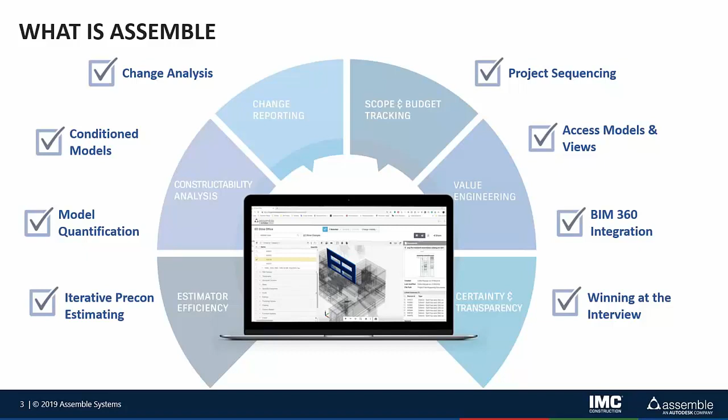And then from there, we have the ability to condition that content and add other classification, organization structure, and then query upon that. So Dave's going to dive into a lot of analytics today and how they use the system to set up the data the right way to provide new lenses, different ways to look at the project. And so that's a really quick, brief introduction of Assemble. We're going to go ahead and dive into IMC's use case and how they're leveraging Assemble to drive a lot of dashboards. So Dave, why don't you give everyone an intro of IMC?

Thanks, Tim. So IMC Construction is a full-service, best value construction firm in the Mid-Atlantic area, located just outside of Philadelphia. We are the second largest contractor in Philadelphia, and we work on projects that range from retail and multifamily all the way to a $210 million lab project and a $180 million medical office building. So we really have quite the diverse range of projects. We really pride ourselves in innovative project delivery, collaborative project delivery, and really making sure we're providing that best value approach to our owners.

The second part of IMC is IMC Construction is part of the Citadel National Construction Group. It's basically a group of regional contractors that get together and work together to serve clients in their regional locations that have national needs. So oftentimes we will partner together to deliver projects for our clients. We get together, we share best practices, we talk about lessons learned, we talk about things that we can improve company to company, and share different resources as well. So it really gives us that national contractor capability as well.

So now we're gonna start diving into some of the things that hopefully people are excited about, and really start to look at some of our use of Assemble and Power BI specifically in pre-construction to begin with. So to start, it's important to understand IMC's approach to pre-construction. We really rely heavily on VDC.

We have 6 full-time VDC estimators that are in-house creating models, and it's very often that we get scenarios like this. This is a project where we received 4 or 5 different facade sketches just like this of a typical bay. We received some sketches of a typical bay of structure, and we needed to establish different budgets for the core and shell of that project.

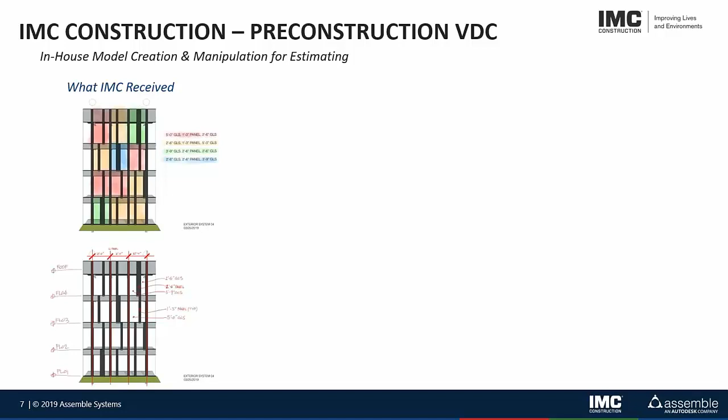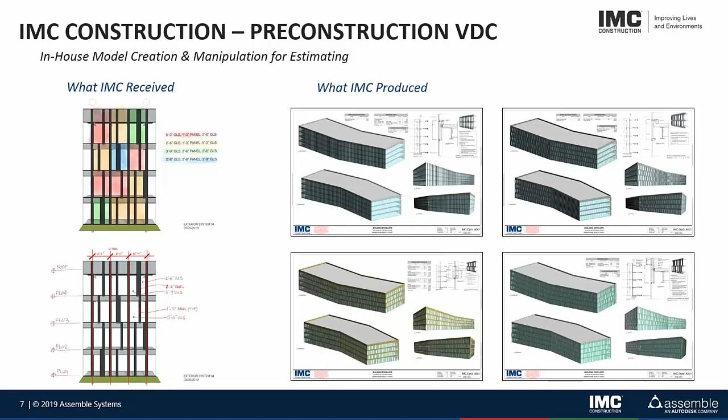What we did from that is we produced our own in-house models of those different facade and structural conditions, and used those drawings to go out to the trade contractors, to different suppliers and vendors with detailed quantities and really get some early pricing that we could go back to the owners and really have some detail rather than just a typical cost per square foot based on a single bay. But what we really needed to be able to do was take this and expand upon it. So this is one example. The same thing with structure.

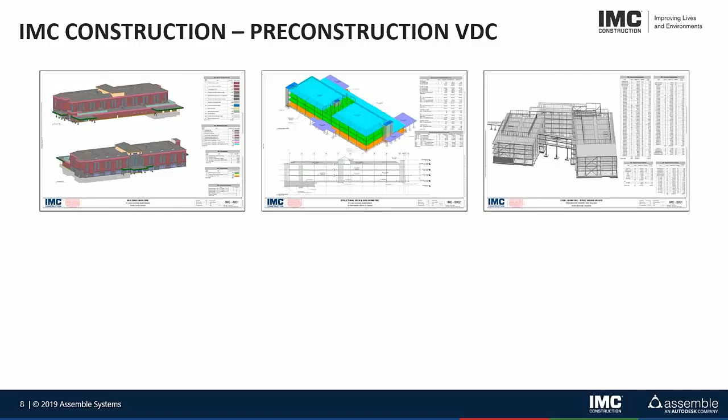We will certainly model the structure, we will certainly model the envelope. There may be different design options that we need to consider. So in here we had a baseline structural option A, structural option B. We'll make a model and a sheet for each one of these versions.

But the other thing we wanted to do is, if you look at the picture at the top right, how could we compare that hospital project to the one on the bottom? We needed to be able to normalize the data sets between these two projects and not just look at overall tonnage. So it really challenged us to think a little bit differently.

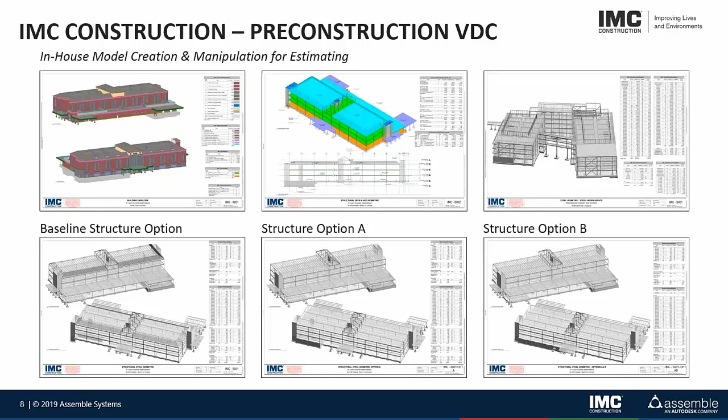On top of that, it's always asking ourselves, how can we do better? What can we do to improve our process? How do we deal with different data sets? What if we had a project like this where we were receiving models weekly for a year? That's 52 different models. If you've got architecture, structure, and MEP, that's 52 different models times 3 models, that's over 150 different models and design iterations to analyze.

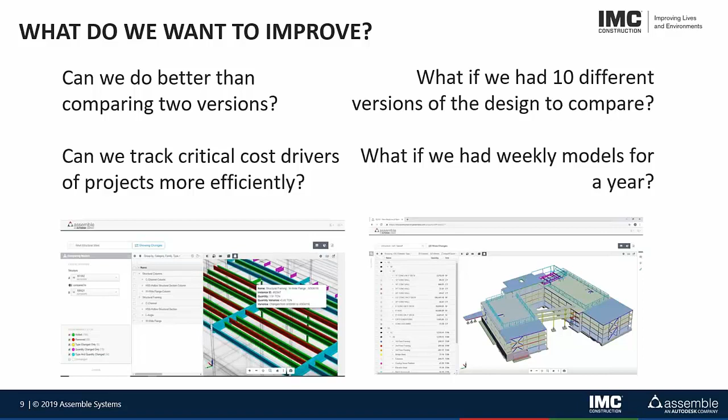That becomes a lot of different sheets and PDFs to compare and analyze, and make sure you're analyzing the data in the same way. So the second challenge we had that we were thinking about was...

We had been using Assemble to compare some different model iterations, some different design models that we were receiving. But one of the challenges was when we're creating models and receiving models, all of the element IDs are changing.

This isn't something that's uncommon for us. We'll always create conceptual and schematic models to communicate our estimates, our budgets, but sometimes we'll get DD and CD models from the design team. If you compare these in Assemble, because it relies on the element IDs, you're going to see that every piece of geometry was added. That's fine for the program, but we needed a way to truly communicate scope change versus development of the drawings versus just grouping things based on element IDs.

So we really needed to think about a different way to group the information, group the quantities, group things in the way that we needed to communicate to the design team and to the owner.

I think that's key, is you have all of this information and there are a lot of different ways you need to look at it depending on the context of the conversation, who you're talking with, what's most relevant, and how you need to visualize and organize that content.

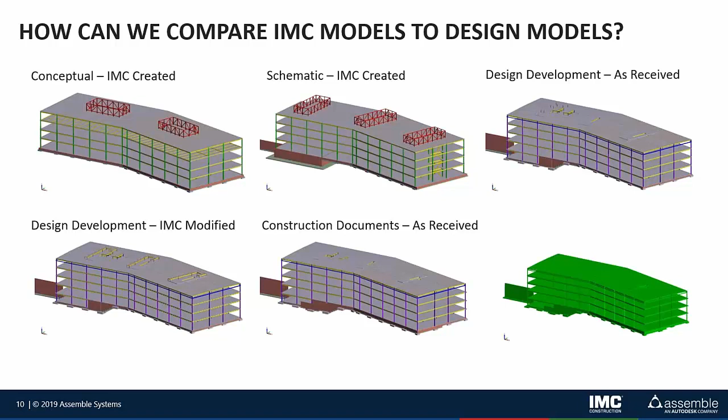So I think that's absolutely valuable, to have that mentality around: okay, this model isn't entirely the right context for this conversation, let me group and organize just this subset of data and apply that to the conversation. I think that's absolutely key to what you have here and what you're going to be building upon to get to these dashboards that you've created.

So one of the first things we did as a group and as a team was really sit down and look at what do we model for most of our projects, and then what do we also see in design models. Those are things we can compare from the beginning to the end if they're in both models throughout the life cycle of the project.

And then it was really asking ourselves, what else do we want? How can we do better? Certainly we'd like to get more into tracking MEP, especially equipment, ductwork, major piping systems. MEP is a big component of the project budget, and the more we can track and control it, certainly the better.

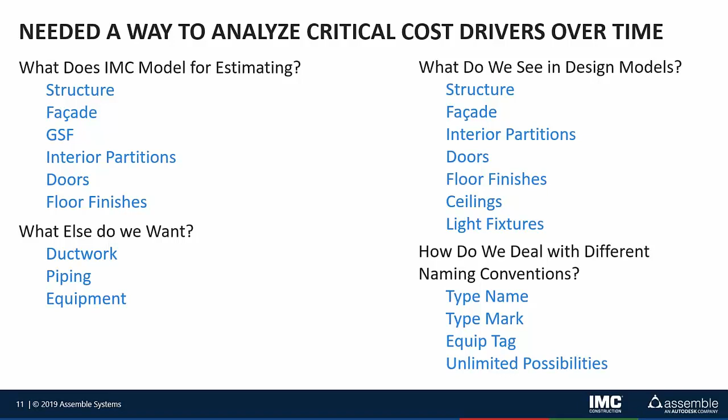The last part is we needed standards and data where we weren't relying on architects and engineers to do things the same way and name things the same way. Everybody does things a little bit differently. We needed our own way to normalize the data set and make sure our templates and standards could apply to any project that came into IMC.

So the next thing, I really highly recommend this if you're just getting into Power BI: we took time and stepped back and went back to pen and paper, pencil, trace paper oftentimes, and we wanted to understand what data we wanted to see and how we wanted it to be shown. We penciled out and sketched dashboards for facade, for concrete, for steel. We started down the MEP route, but we wanted to start simple with the things we know we're going to get on every single job.

It's a quick collaborative process before you really get into the complexities of Power BI, which if you haven't worked with a database program can be overwhelming the first time. I love this, and I love the interaction you talk about with your team.

To me, it's so cheap to work through this on paper with colored pencils or markers like you have here. You can iterate on it, then share out and actually show others the sense of what kind of information you can drill into and why.

I think that conversation, the visual here, leads to why are we doing this, why are we setting this up, and what information can I get out of it and drill into. It's so valuable to have this kind of session and brainstorming with the visual there to lay things out and understand what kind of input you can get from the team, your project managers, superintendent, or executive group, and what information you can provide to them.

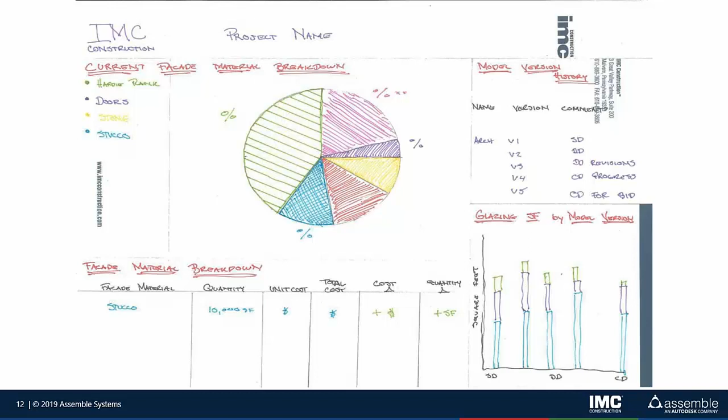It's so valuable. So the last step before we really dove into Power BI and creating some standards was mapping out a workflow and picking the data pieces we needed to have in order to normalize every model into a way that we wanted to look at it and track it.

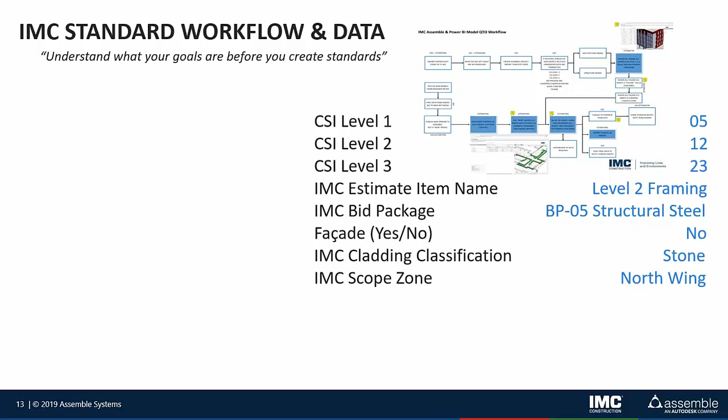For now, we started simple. We basically created 8 different parameters inside our Revit shared parameters file that get applied to every single model we have. Then from there, it was how are we going to leverage them?

What is used in Assemble? What is used in Power BI? What are we sharing with our project managers in the field on their iPads or in different systems? How are we breaking things down by bid package?

The façade one is one you'll see a lot throughout the presentation. We like to track façade—it's a big critical cost component, a big schedule driver, and it's important to get the building enclosed. There's a couple different things you'll see with that, but this really allowed us to leverage our data in Assemble and Power BI the way our company needed to see it, rather than just relying on Revit category, family, type, which has opened our eyes and our possibilities in terms of standards and different deliverables to our clients.

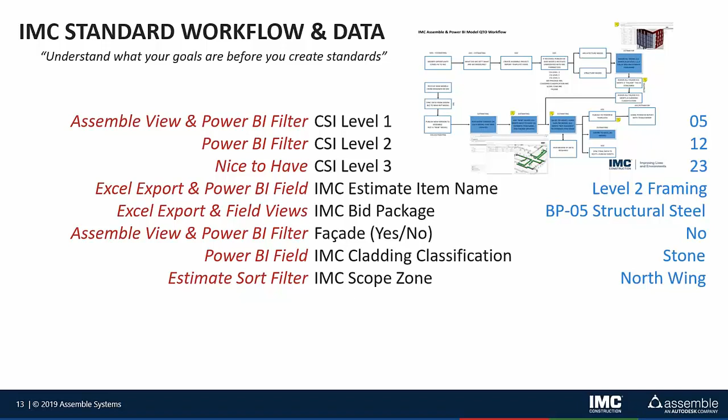So the next thing—our workflow is structured to allow people that are not Revit specialists to use the data. That's one of our key things: we want people to leverage the data and the models, but they don't all have to be Revit specialists. They don't have to understand what a shared parameter is, a text file, and how different things work inside Revit. But Assemble is fairly easy for them to grasp.

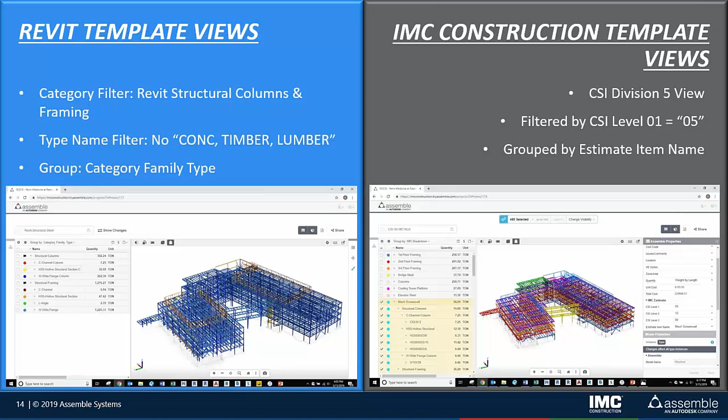You don't have to install software on people's computer. The biggest thing we want them to do is take template views that we've set up and then move the data from Revit into IMC Construction standards. So this next slide will go through step by step a little bit of how that works.

The key takeaway is we really want people to leverage the groupings we've set up with Revit views to populate the data. On the slide before, you saw the example of the Revit structural steel where we have a view that shows everything except lumber, concrete, timber. This has worked for about 95% of the projects I've experienced, to filter that view to just components that have structural steel.

So in one view, I can assign the CSI level, the CSI codes for structural steel, different estimate item names if I want to change it to grouping by level—so first floor framing, second floor framing, whatever it may be—and then I can lump assign all of that steel to one bid package. So in one view, I've probably assigned all the data I need to in roughly 60% of the structural model elements.

The same type of thing with concrete. There's a couple different views you have to go through, but you open the concrete views, you populate the CSI, and everything funnels up into the IMC views that we have, or the summary takeoff at the bottom right.

This is, I think, a foundational thing with Assemble too, having a good structure to those views so that those who aren't totally familiar with the parameters and what properties get aggregated to create these views can easily set these up as a template and bring them into each project, so you as the facilitator can get your team moving and get the right data sets in front of them.

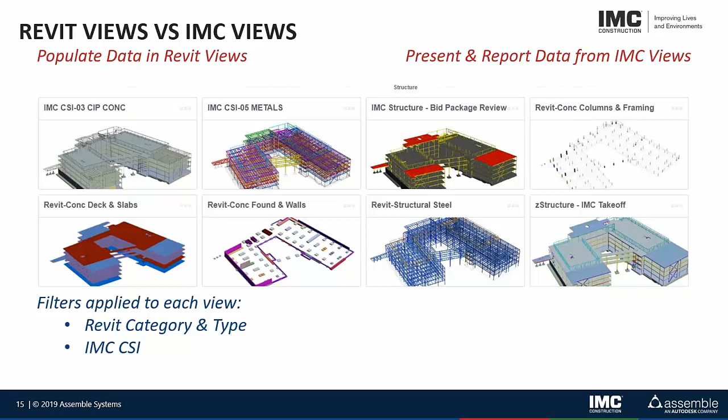So the next thing is, if you look on the left, you'll start to see different namings than Revit category family types. This is reporting the estimate line items based on the structural steel for this project. Our ultimate goal is to align that with monthly billing applications from every contractor. These are views we're setting up for project managers, superintendents, and owners to see the scope being billed and installed every month, rather than just how Revit groups things.

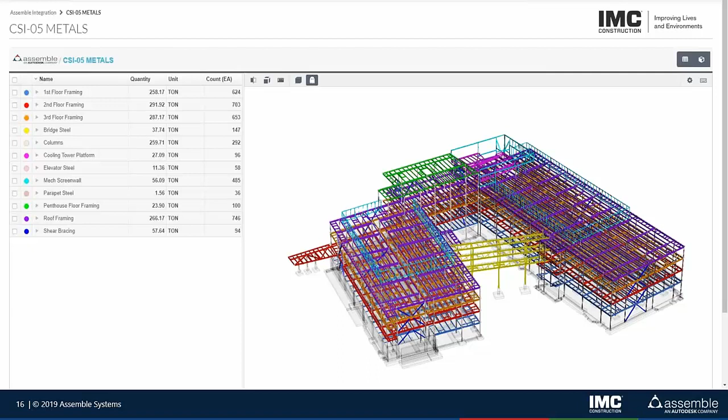Again, it's multiple users collaborating on the same data set, organizing the data how we want to, not how Revit wants to organize it. Finally, we've organized the data, we've gone through standards. This is the first dashboard we're going to talk about.

This is the Power BI version of the pencil copy we looked at earlier for reporting on the facade. I talked about the facade parameters - instead of relying on a wall function being an exterior wall or a type name that's an exterior wall, we literally go into the model assigning windows, doors, curtain wall systems, different walls as part of the facade, and then classify the general cladding type. This allows us to track critical components, percentages of curtain wall, storefront, etc.

What I really think is important is that as you look at this, you understand the data behind it and the science behind it - where some of the data is coming from. So on all of our dashboards, we use the Assemble project name, which we have standards for. We have the model version name, which we have standards for, and then comments that give us an idea internal to IMC about what's in that model, what's not in that model, what we need to know about.

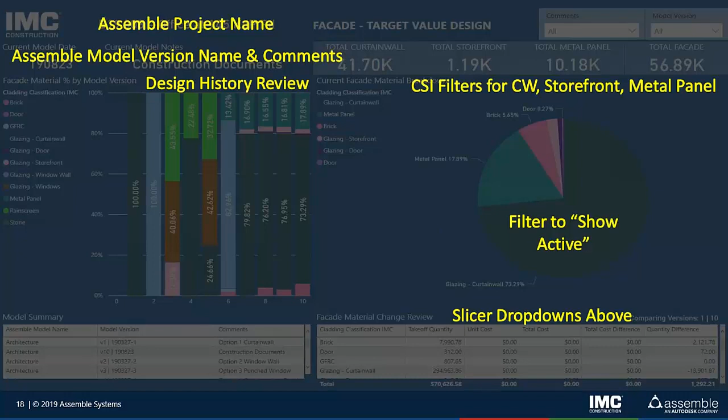And you can quickly see on that dashboard a table that shows architectural models and the individual versions on the lower left there, using comments to organize those, as you mentioned. So you do have the ability to bring in not only multiple models, but multiple versions, and that's what you're going to get into here in just a minute.

Yeah, so the bar chart on the left shows all 10 different versions of the architecture model that we've either created or received, and the different materials that were on that model at any point in time.

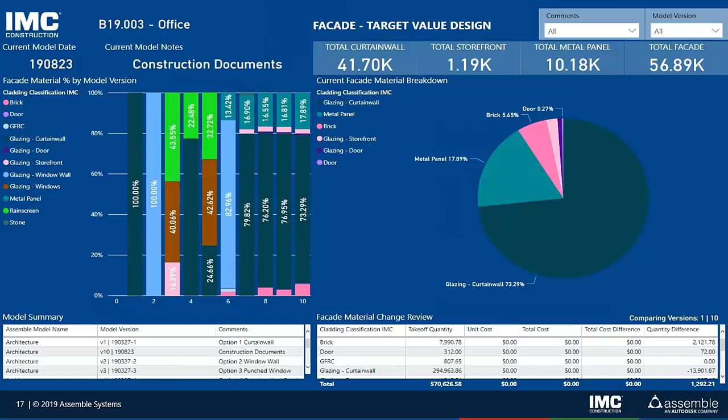So the next part of this is once we have this data for one project, we want to start collecting it for multiple projects and figure out a way to compare cost drivers project to project. Can we compare overall glazing percentage or curtain wall percentage on 5 projects of the same type?

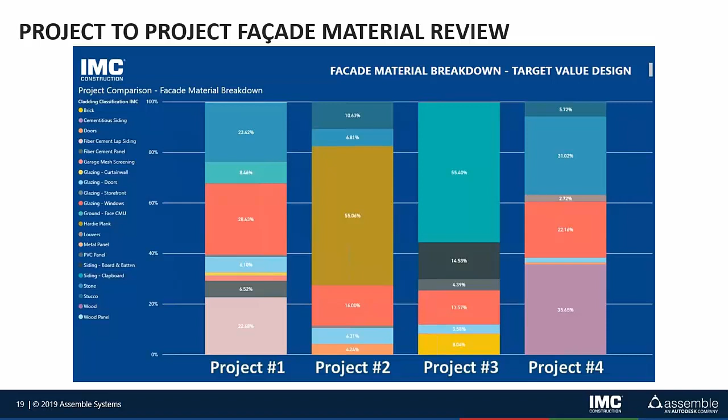That really starts to become something that you can track and analyze and have a discussion on value engineering or why a project might have a higher cost. So really, again, it's kind of data analytics at a big scale across multiple projects. We're intending to do this same type of thing with structural steel, with concrete, with, like I said, the possibilities are endless. So the next one, this is concrete.

So for concrete, everything that we're tracking over time. We're tracking total cubic yardage, so we have KPIs at the top again. What is our total flat work square footage, slab on grade, slab on deck? What is our total vertical wall, retaining wall, foundation wall? And then what is our foundation cubic yards?

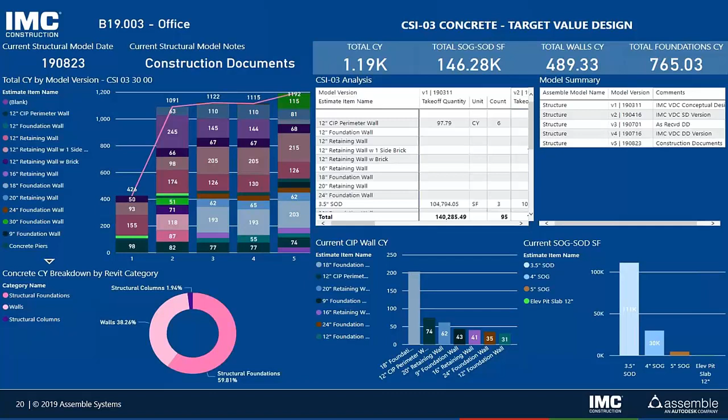Different things that our estimators wanted to have, our project managers wanted to have, our schedulers wanted to have, just to be able to use in scope reviews, in budget reviews with owners, and then schedule updates as well. So there's a lot of data here, and we've got a few more to get to, so we're going to keep moving. For structural steel, same type of thing.

We're tracking total tons, this time back checking against the pounds per square foot that was written into the design narrative from day one. And then we're also tracking what is the total piece count that we have, what is the total linear footage of railing, based again on the CSI 0552 as the filter for that.

The stair count was an interesting one for a little while. We had to figure out how to get the riser count to show up as the quantity in that. But if you are familiar with adding parameters inside of Power BI, it's just adding the parameter and changing it to the right kind of data type.

But hopefully you're starting to see some consistency in the templates that we've set up, just location of different things and how some of the information is tracked and reported and compared, to have our team trained to go to some of the same places to look for the information.

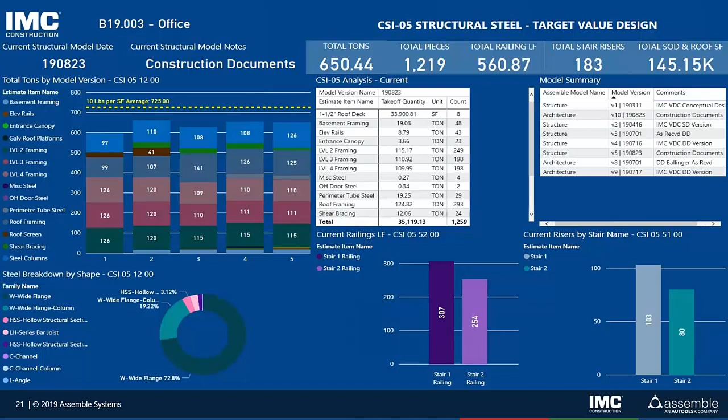So I showed a couple different dashboards there that had a lot of data on it and relied on the data that we're entering. One of the most important things with data analytics is to have a QA/QC process. You have to trust the data that you're looking at. So there's two main ways I review our data in Assemble and Power BI. This is the first one, straight from Assemble's Power BI templates.

The only modification that I did to it was on the left side, instead of grouping things by Revit category family type, this is grouping things based off the estimate item name parameter for IMC standards. So this is the way that we're communicating the scope, the quantity in our estimate line items and in those views that our project managers are using. So this is the same way I want to analyze it.

I'm just looking for wide-scale quantity changes, count changes. Are there big quantities that aren't assigned to anything? Just a quick high-level way to analyze changes between different model versions.

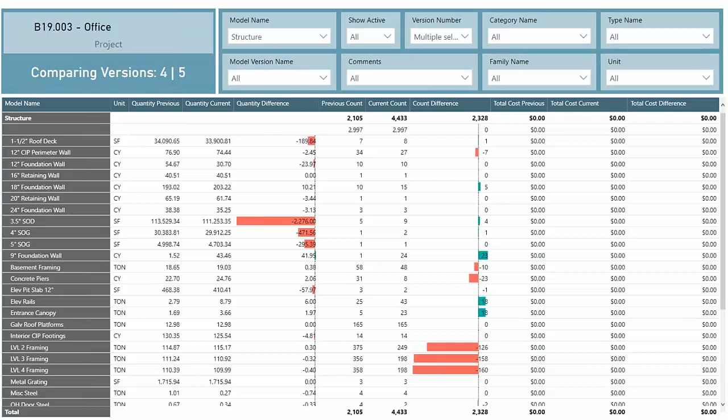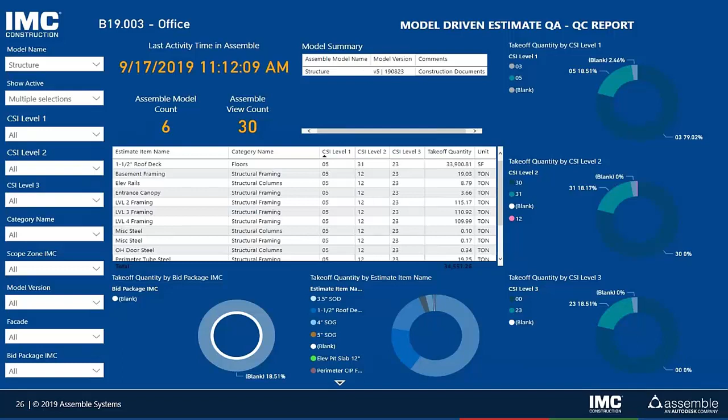The next part is it's important to check the units of everything. So I will start to look at 05 12 23 structural steel across the entire project and make sure that every unit in that is tonnage. It's just a quick way to filter the data how I want to see it.

And then the last one that I'm going to show is what things have an estimate item name that's blank. And this is important because this is an Excel export that we used based off all the data that's either in each model or the entire project of Assemble, to export that goes straight into some of our estimates.

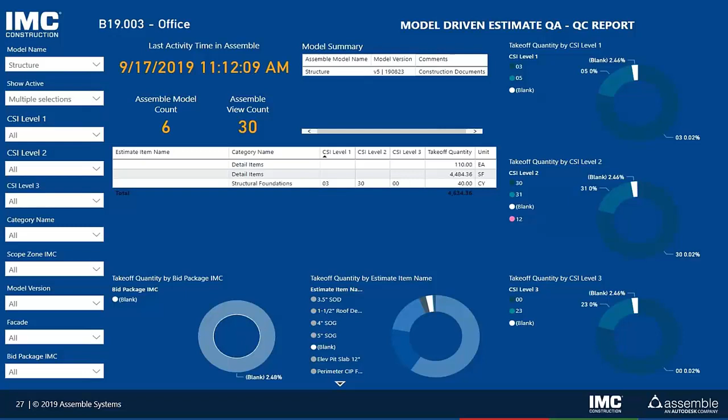So understanding things that we've assigned to CSI code but don't have an estimate item name is very important to us to understand that the data we're using and the data we're leveraging is accurate.

So the next thing we're going to talk about is we kind of want to dive a little bit into some of the uses in the construction projects that we have going on. It's a little bit different than some of the data we've been using in pre-construction, but there's still a lot of value in some of this.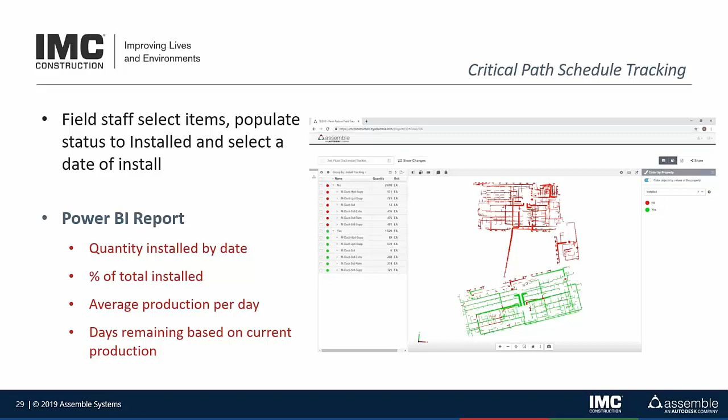This was just us kind of sitting down with our VP of operations, a couple different of our superintendents, project managers, and really kind of brainstorming what are the possibilities, what's possible, and really kind of what do we want. So from there, we had one project. They decided to kind of track installation of MEP through Assemble.

I first told them, I said, I think you're crazy because it's not easy to select every piece of ductwork or every pipe on a project, but we talked about it. They wanted to do it because on their last project it was a challenge for them, so they wanted a better system and a better way. So I worked with them. I helped them get things set up.

We used the Navisworks Publisher plugin for Assemble, which is very nice because you can filter basically what comes into Assemble. This is showing just ductwork, high pressure, low pressure, medium pressure supply, return, and then VAVs and mechanical equipment. We didn't pull in hangers, we didn't pull in diffusers, we didn't pull in insulation. We just wanted what we needed inside of Assemble, so it kind of kept our tracking database inside of Power BI a lot cleaner.

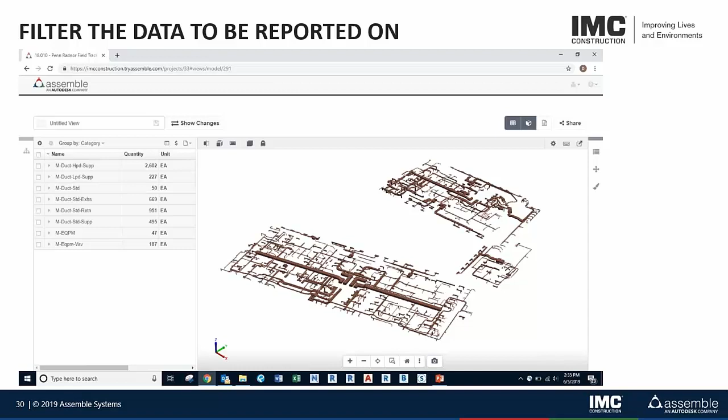The next step, and Tim and I were actually talking about this before the webinar, is you really got to set things up so it's easy for the field to use it. Creating views for each system on each floor so they can just open what they want to see on their iPads in the field and update a system at a time rather than seeing the whole floor will make it a little bit easier for them to use and easier for them to populate the data. This really went a long way.

The other thing that really helped our superintendent use it is just using a stylus on the iPad and learning about the multi-select. Being able to select more things on the iPad, it was a game changer for him, and he's loved it ever since.

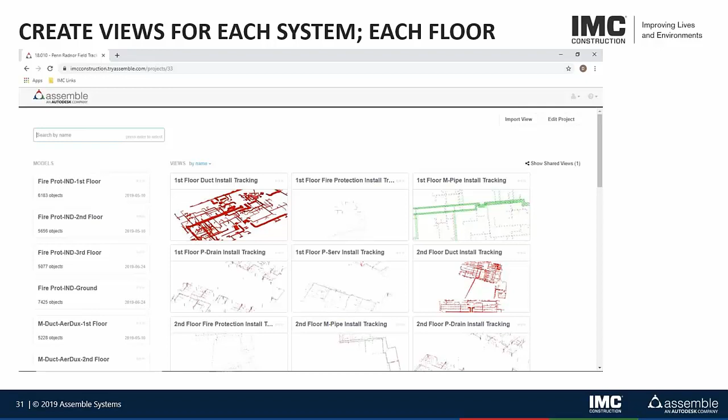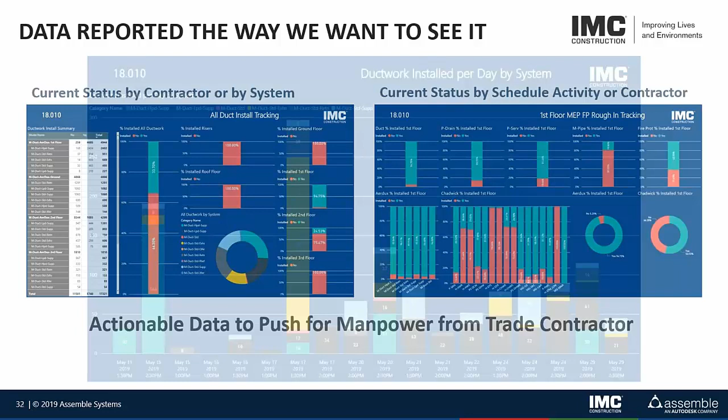The next thing, if you're relying on somebody else to enter the data, you kind of need a QA/QC process to check it. If you look at the dates across the bottom, they're fairly day by day, but you see the spike on May 17th that we updated a ton of ductwork that was installed. So if we're analyzing a piece count per day of ductwork that's installed, that's going to create an anomaly in the data. We can exclude that from the productivity count.

There's different things you can do. It's just you need a process to make sure you understand what it is that you're looking at and the overall data that you're analyzing and what different kind of variables there may be within it.

I just want to highlight that statement. You definitely need to put a process in place to understand what you're looking at. In different dashboards here, you've talked about how you go about analyzing what information is incorporated, ensuring that your Division 5 is all listed as tonnage of steel, diving into removing anomalies and making sure you're looking at the right data.

I think that's key, and I think that's something that's hard for a lot of people to get their mind wrapped around, but certainly the Assemble team can help with that and can help set up this kind of process, and I know that you've worked with a number from our team to set this kind of thing up. So I just want to point that out because it is key to set up the right process to understand what the data is telling you.

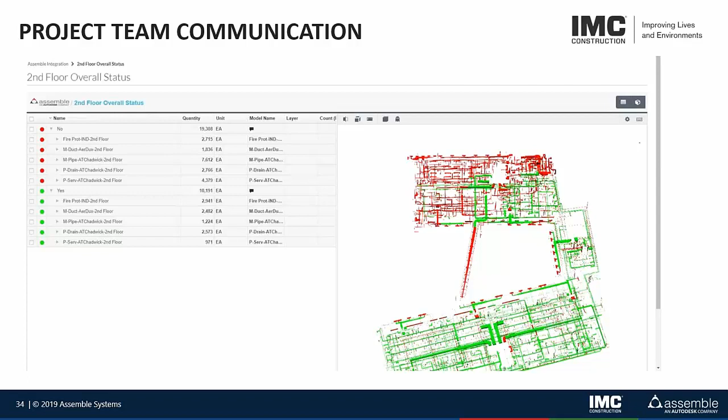This level of collaboration and understanding has been incredible to watch. We have piping foremen and ductwork foremen actively asking to be part of this process and how they can update the data for us rather than us updating it, which maybe on the next project that's what we'll get. I would be super excited if that were to happen.

So the next part, a lot simpler in concept than tracking the MEP installation, but very important to our project schedules and delivering the building on time, is how we track the installation of the facade systems. This project is a 400-unit apartment complex, and they have 22 different facade materials across 11 different elevations.

The first thing that we already had from pre-construction, in order to populate that facade report of the percentages of each material, was elements of the facade isolated. So that's this view. The next thing, if we're going to drive schedule based off of each elevation, we needed to divide the facade into the elevations corresponding with the drawings. That was step one, done with the help of our VDC department.

The second step is making sure that all of those materials are still applicable. Were there any design changes? Was there anything that needed to change in terms of a cladding classification? We went through this with our project team and the architect and made sure that the cladding classifications we applied back in pre-construction were still applicable when they were going to install the facade.

The final part is very similar to tracking the MEP installation. We're using a yes-no parameter to identify what pieces have been installed and what are yet to be installed. This project team chose to only track installation of finished materials on the facade, so we're not tracking studs or air vapor barrier, just whether the brick, metal panel, HardiePlank, or whatever the finished material is has been installed yet or not.

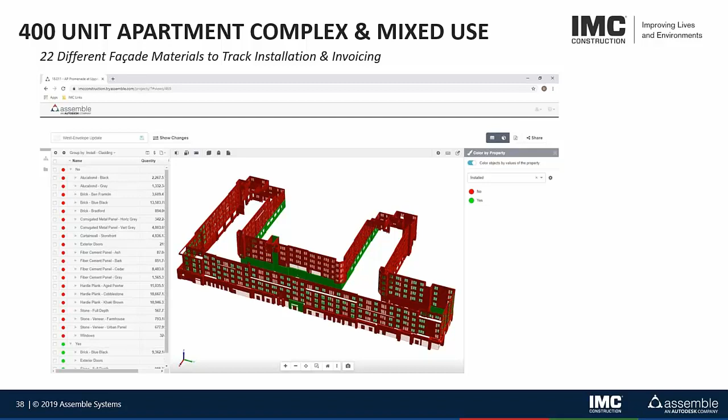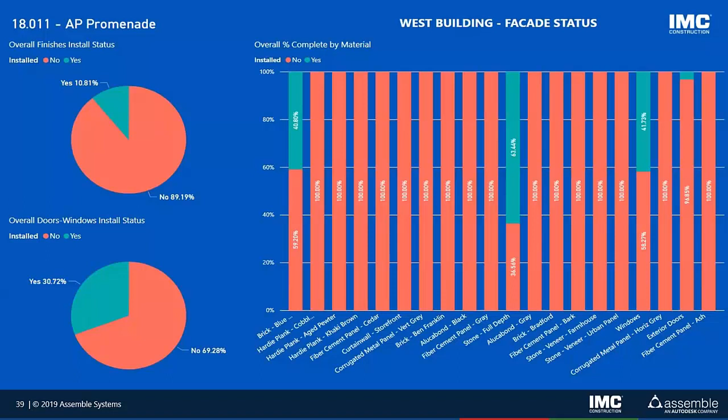Again, that was the team's decision. Understanding that decision up front allows you to structure and group the data in different ways. The first dashboard that we're going to look at is basically percent complete of each material on the building. Some people want to look at it this way. Some want to see the overall quantity of each material and what's been installed so far. This allows you to begin to prioritize maybe your top 5 materials.

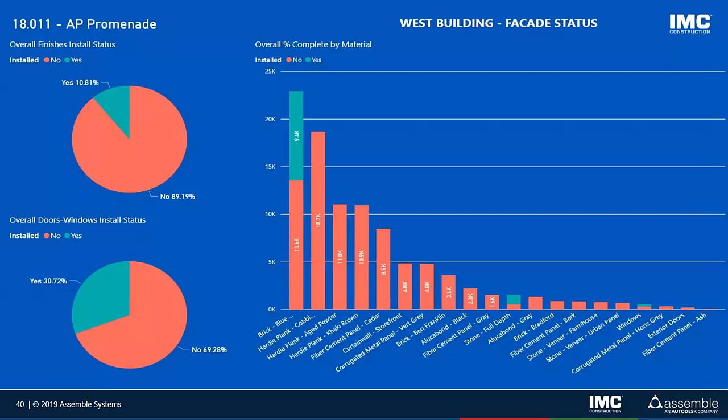Maybe you want to divide it by elevation and look at it a different way. I said it before, dashboards are kind of free in Power BI. Once you understand how to make them, you can group the data any way you want, whether for the superintendent, the scheduler, the project manager, all the way to our VP of operations who might want to see a percent complete on all of the facade installation. It really comes down to how you want to see and group the data, and having a process in place to analyze the quality of the data you're looking at.

Another example is how we use the data inside of Assemble, inside of our projects, to really inform our schedules. This is an example of an apartment complex. The original schedule was broken down by the buildings rather than by each elevation. Our superintendent and our trade contractors wanted to manage and drive the project based off of the elevation rather than having something 30, 40 days as a look ahead. They wanted to know what their deliverable was every 5 days, every 6 days, every 10 days. That smaller, manageable task list that you can get to and drive results from.

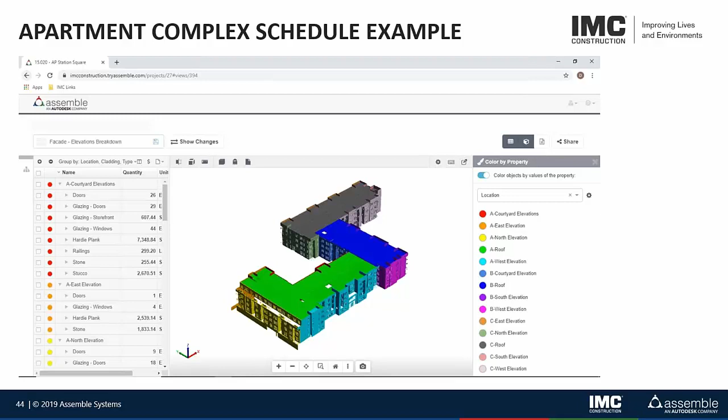So the first thing we needed to do was group the facade elements that we had. From our estimating phase, we already had the facade separated. We just needed to group it into each building, so we grouped it into building A and building B. Then for each elevation, we kept the roofing with this and just assigned the roof a different tag for location instead of elevation.

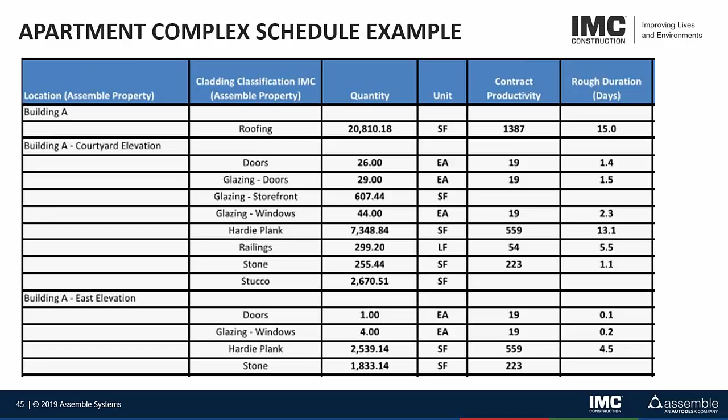It really allowed us to take those quantities from buildings A and B and the original contract schedule dates, and back out a contracted productivity of each contractor. From there, we could use that productivity and the quantities we were pulling from each elevation to get the contracted duration on each elevation, really allowing us to get some detail into our schedule, plan how we were going to work our way around the building, different scaffolding shifts, different contractor moves, and really get into the detail of the project.

The last example I have is where we're headed, and I would not be here without the help of Assemble. Tim mentioned it earlier, John Pryor has been a huge help to me throughout this, especially this one. With any project, what you really want to measure in terms of schedule is what was your original plan and where are you at against that.

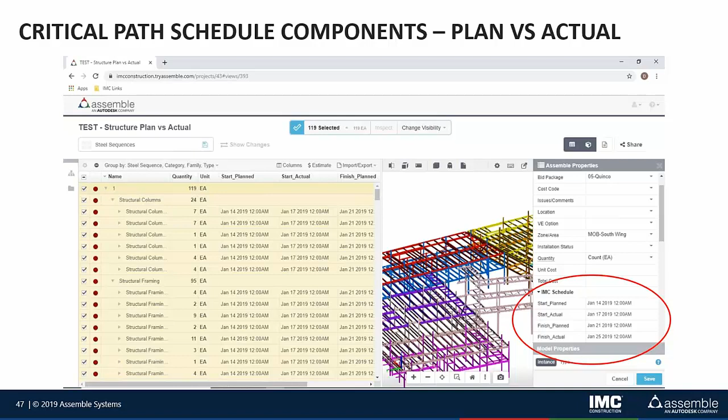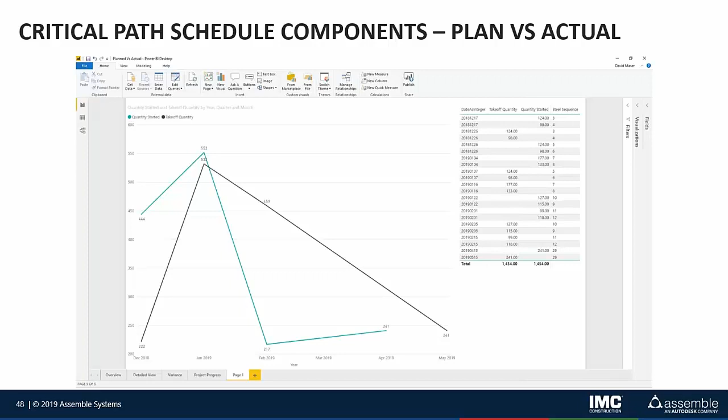This is the planned schedule against the actual schedule for 4 different sequences of steel for that project. So it is possible, and it's always about continuous improvement, finding a way to be better, and this is our next step. It's not easy, but it's a challenge that we want to get to and make sure we can use on every one of our projects moving forward.

Finally, I think it's important to talk about lessons learned over the last 2 years of using Assemble and Power BI. There are things you can learn to look for, prepare for, and think about early rather than finding surprises. The first example: this is the project where we were tracking MEP installation based off the layers of the sheet metal contractor's model. This is the rooftop ductwork model showing the roof, the air handlers, the fans, different mechanical equipment inside of either the supply duct system or an exhaust duct system.

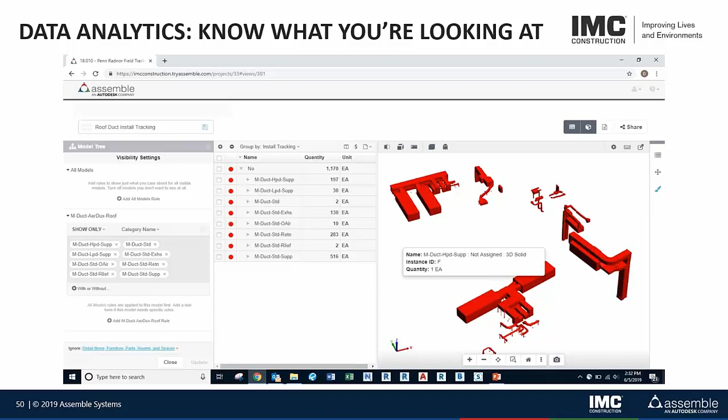So it's really starting to mess with our geometry count. We're not truly tracking pieces of ductwork here because now we have pieces that aren't ductwork. We have risers that are documented in multiple models. You've got to find a way to either filter the data or live with it and understand that you're looking at data that's not 100% correct. These are facts of life, and you've got to figure out how to work your way around it. Another example from the same project, the piping contractor. We reached out and asked him, is there a way to put the weld joints on piping on a separate layer?

His response back to us was, no, I can't. So if you think about it, if we're analyzing the pieces of geometry that say yes, they're installed, against the pieces of geometry that say no, they're not installed, in this picture it's going to say that we're 66% complete with installation. Is that something you can live with?

That's something that you've got to know, that you're at least making the choice. If you don't know you're making the choice, then you might believe you're looking at data that's 100% correct instead of data that might have a 10% plus or minus variance. The other thing you can do in this situation is, if the superintendent is clicking on pieces of pipe and updating that they're installed, maybe a VDC person can go into the model and do a window select to catch some of these weld joints.

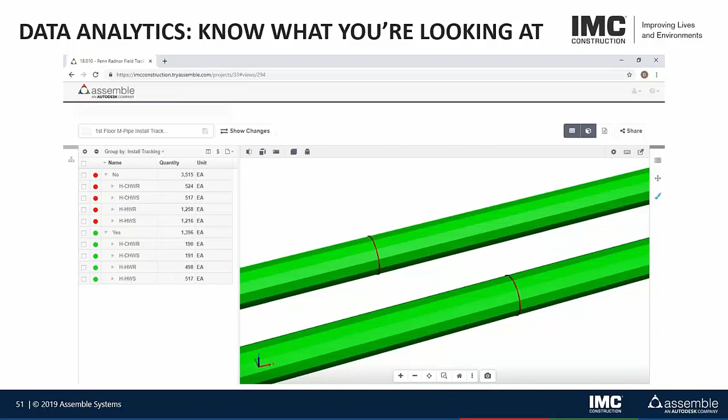It just comes down to understanding what are you looking at, what is the data truly representing. Data analytics can be a dangerous thing. You really have to have trust in the data that you're looking at and understand the equations behind the scenes that are driving the data. So some of the big picture things: one of my favorite quotes is, data is nice, but structured data is powerful. So standards will help you go a long way. Come up with how you want to see the data.

Don't just rely on Revit, because if you're relying on models from different designers, they're always going to have different naming conventions. Different designers use type name, different ones use type mark. Other designers have their own parameter. You've got to have a way to normalize the data if you want to build your own database to compare either over time or against models you're making your own or project to project. It's all about understanding what is your big picture goal and then how you get there.

So in summary, we'll talk a little bit about results. Assemble and Power BI have really helped us, definitely with takeoff time, quantity takeoffs. We've improved that process. The biggest thing it has helped us with is trending reports and variance reporting over time. Like I said, a lot of times we will create models at different design iterations, and then we'll get a model or a drawing update from a design team. Being able to go back and analyze any two points in time based off a couple different filters in Power BI is very powerful if you're sitting in a meeting with an owner.